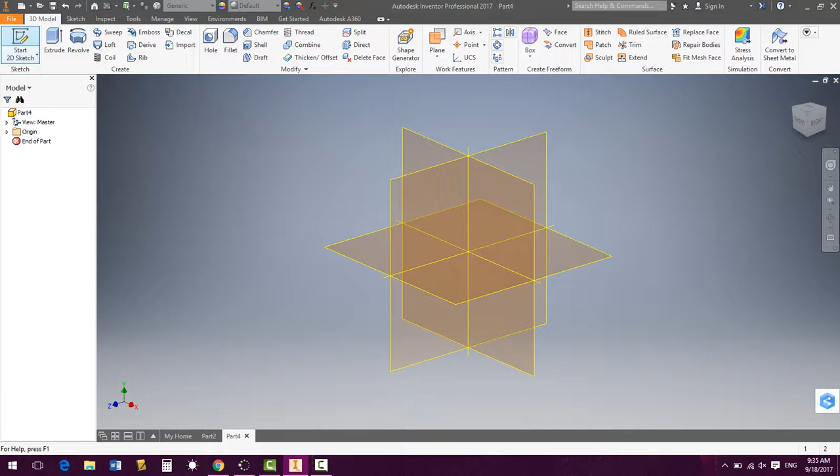Alright, what I'm going to show you in this video is the process used for how to mirror an object over so that you can have the same item. So we'll start a new sketch, and if I were making something detailed enough that I wanted to replicate it on the other side with exactness, I could first draw just part of the item.

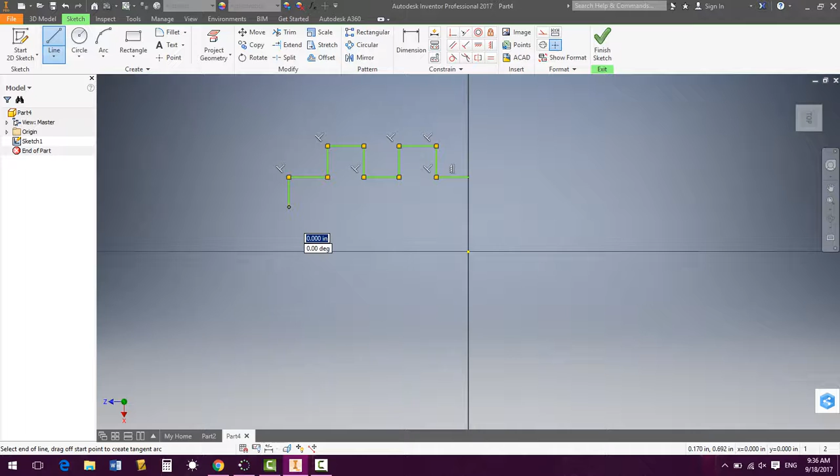So let's say I want to take this item and put it down here as well, and over here too, so I want to do all of it. What I'm essentially going to do is just draw a quarter of the item. Now I could have used my lines here, but what I want to do is then draw...

I still will have to have this line across the center, but it's irrelevant. We're going to end up erasing it.

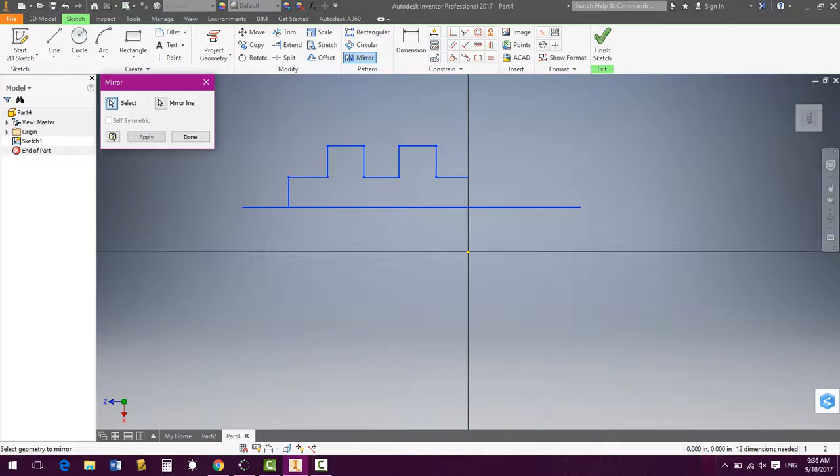What I'm going to do then, while I'm still in sketch mode, is select mirror. I need to either drag and drop and select the items till they're blue, or click on each individual one. After I've selected what I want to mirror, I have to select the arrow for mirror line and select my mirror line. Once I hit apply, it's going to replicate the item onto the other side, and I can hit done.

At this point, I can go in and trim out my mirror line. It does like to pull the mirror line in the process. Anywhere you see the dotting is where it's going to remove it.

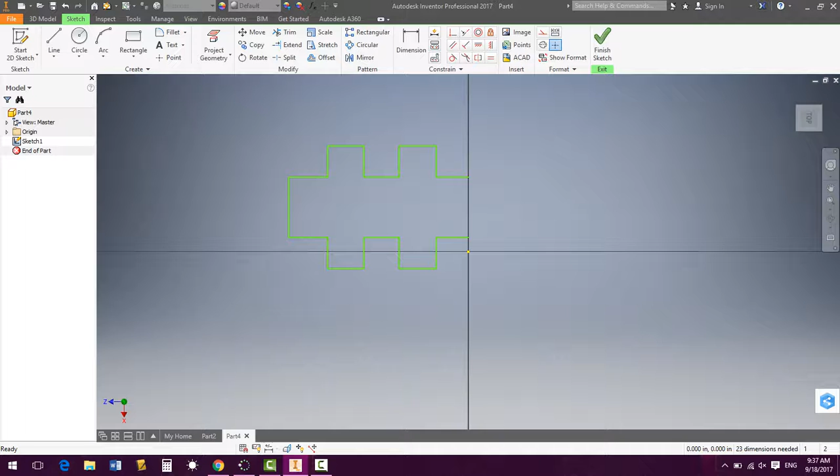Now if I wanted to mirror this whole object over to the other side, all I would do is come back in, draw a line this direction, select mirror, and again select the object I want to mirror, then the mirror line. I'm going to select that line down the center, hit apply, done, and then I can go back in again and trim my mirror line out.

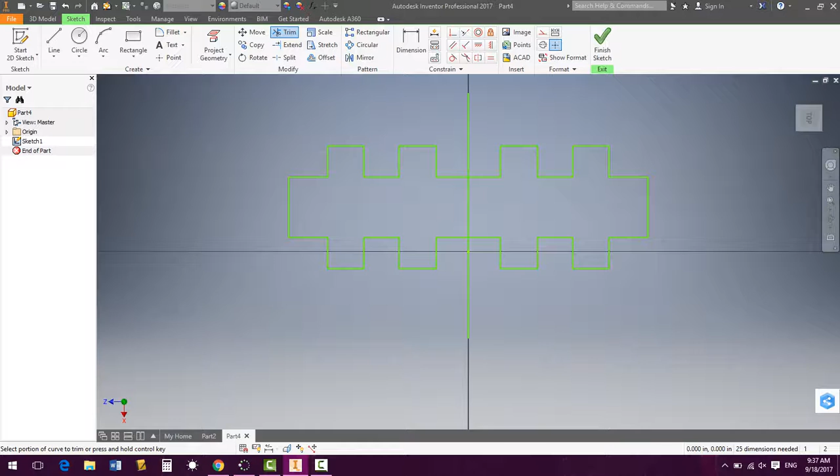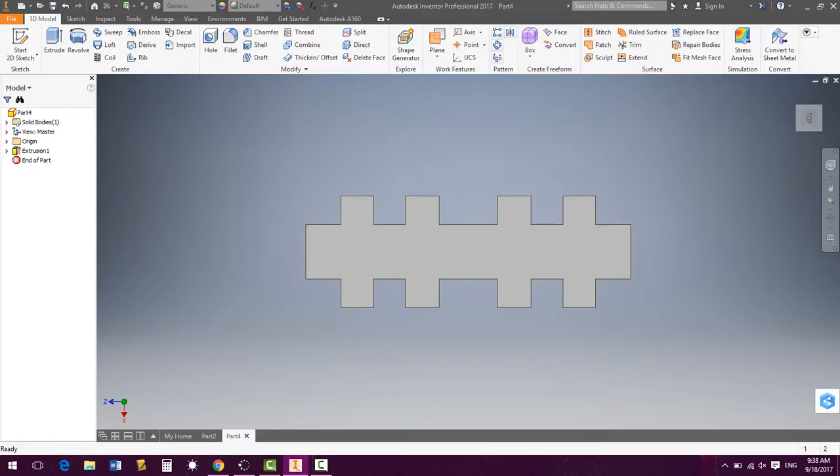Okay, the mirror line is something we're just using to help us along the way. And now I have the exact same item that I drew at the top mirrored to the side and over, and then I can choose if I want to extrude this item, and I have something that's equal on each side, and we're able to see that pattern.

Now if I'd put in exact numbers, that would have made these spaces in between all exact. To avoid this larger space, I would have wanted to only go half of what the spacing is. So if this line I'm clicking on now were a ½ inch, I would have only wanted to draw a ¼ inch of it here, because when I mirror it across the side, the other ¼ inch would then appear.

Same thing here on this line. If this whole thing was supposed to be a ½ inch wide, I would only want to draw a ¼ inch of it, so that when I mirror it, it mirrors the other ¼ inch, making it total a ½ inch. So for parts close to your mirror line, you want to draw only half of what you want that value to be, so it does not double in size there.

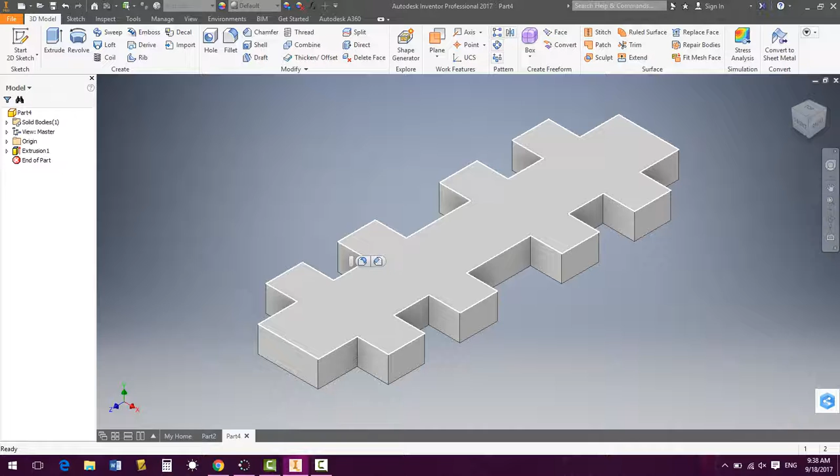If I went in to try to dimension this after the fact, it's going to then play with all the other tabs and make them larger or smaller based on what I'm dimensioning this line to be.